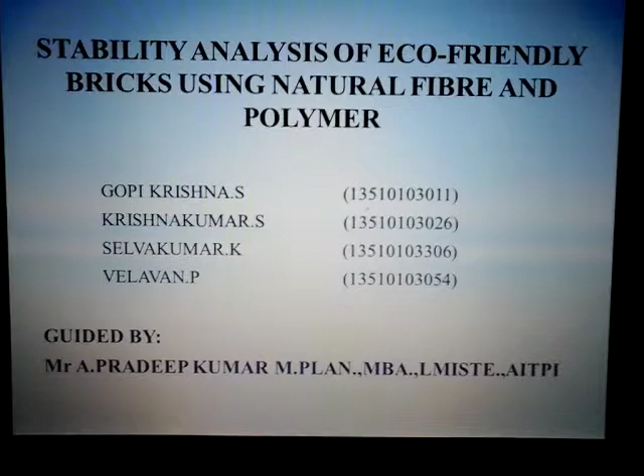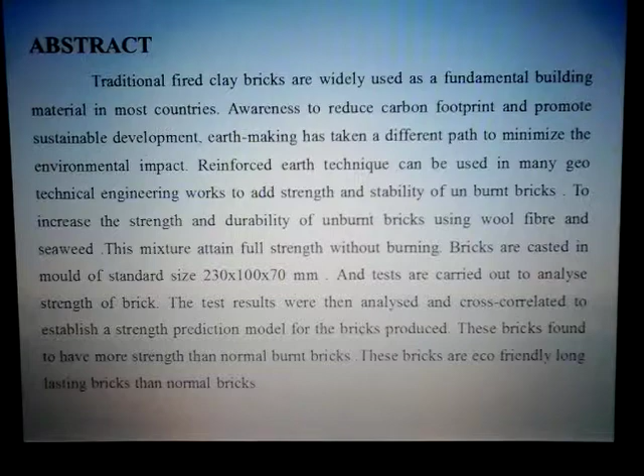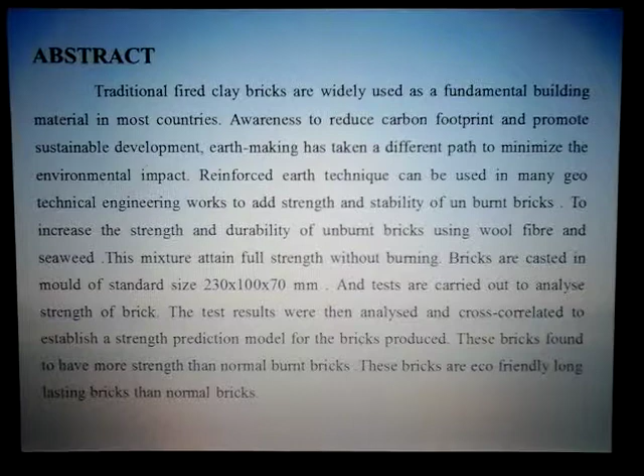This is our project abstract. Traditional fired clay bricks are widely used as fundamental building material in most countries. There is growing awareness to reduce carbon footprint and promote sustainable development. Reinforced earth technique can be used in many geotechnical engineering works to add strength and stability to unburned bricks, and the mixture attains full strength without burning. The bricks are cast in molds of size 230 x 100 x 70 mm, and tests are carried out to analyze the strength of brick. The tests are analyzed and cross-correlated to establish a strength prediction model of the brick produced. The bricks are eco-friendly and long-lasting compared to normal bricks.

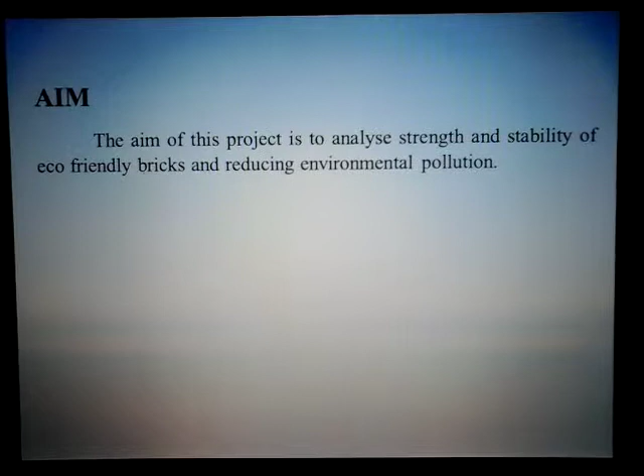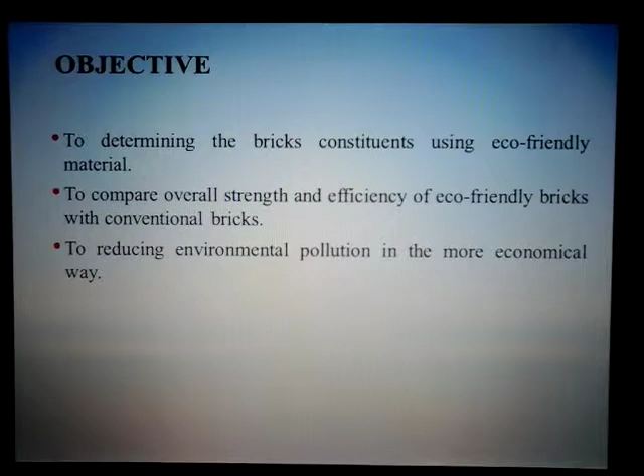Our project aim is to analyze the strength and stability of eco-friendly bricks and reduce environmental pollution. Our project objective is to determine brick constituents using eco-friendly material, to compare the overall strength and efficiency of eco-friendly bricks with conventional bricks, and to reduce environmental pollution in a more economical way.

This is our project methodology. First is site and soil selection, next is soil sampling methods, and soil sampling methodology, and next soil test methodology, which is split into field test and lab test. Next is mixing of wool fiber and seaweed, then molding, drying and testing, and last, results and conclusion.

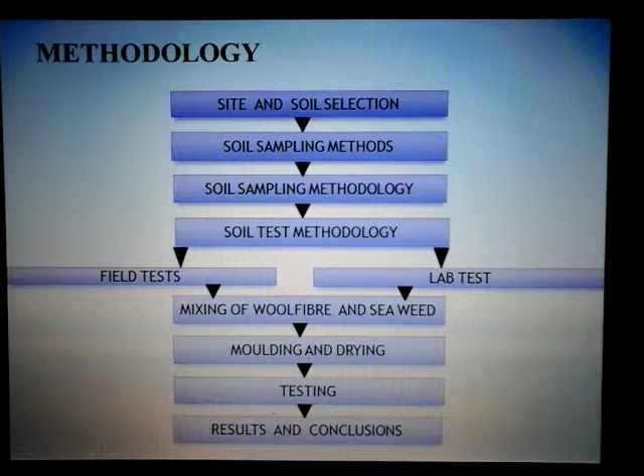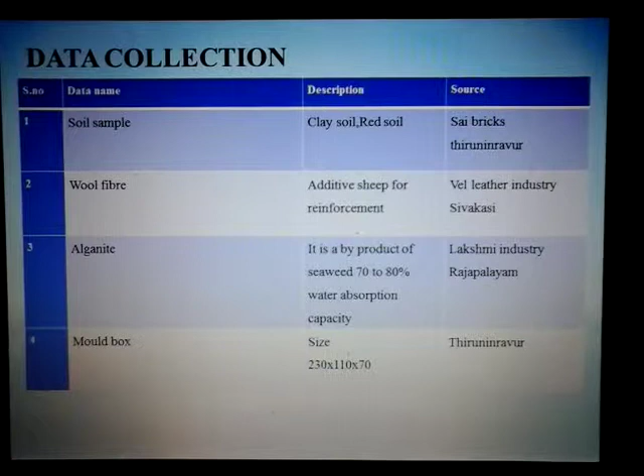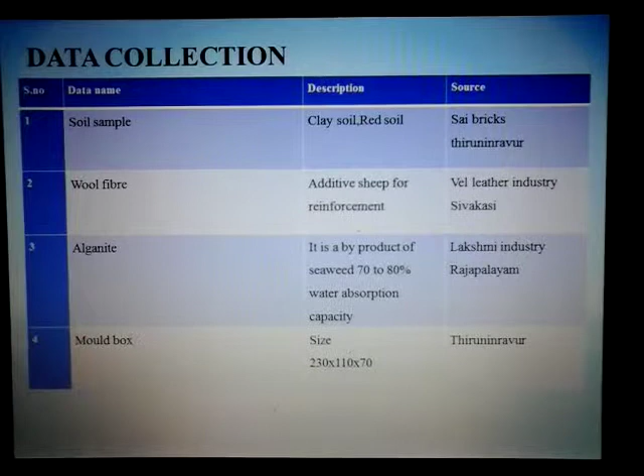This is our data collection. Soil sample was collected for clay soil from Sai bricks, and wool fiber was collected from Vel leather industry in Sivakasi. Alganite powder was collected from Lakshmi industry in Rajapalayam. The mold box was collected from Sai bricks in Thiruninravur.

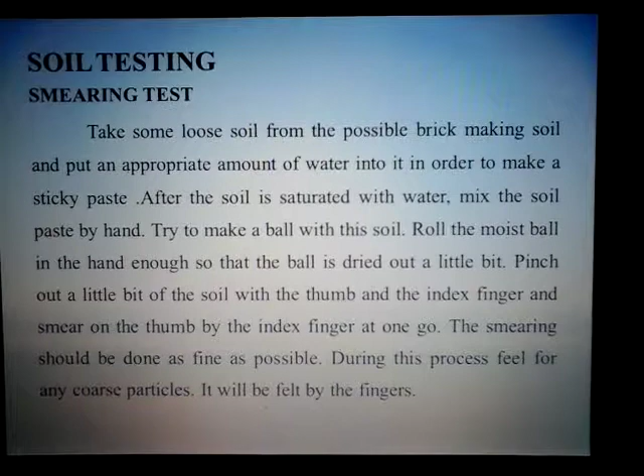This is our soil testing, the smearing test. Take some loose soil from the possible brick-making soil and put an appropriate amount of water into it in order to make a sticky paste. After the soil is saturated with water, mix the soil paste by hand and try to make a ball with the soil. This is our smearing test, which can be conducted in the field.

This is our lime test. Lime is one of the most dangerous minerals for brick making. The presence of lime in soil determines whether to start a brick business or look for alternate soil if none is available.

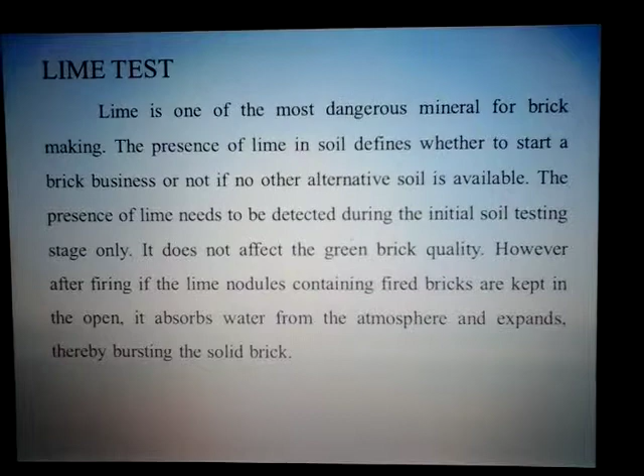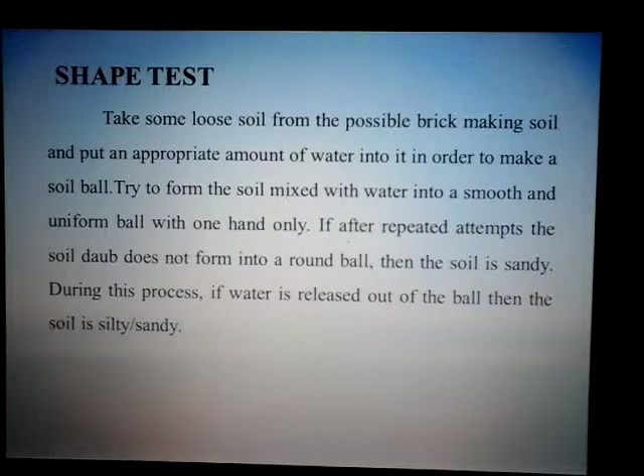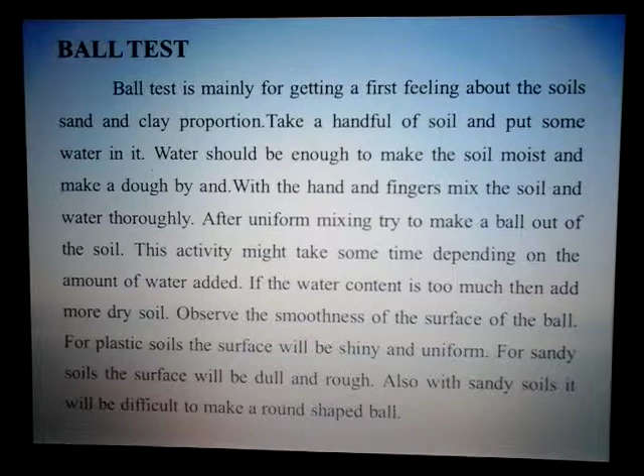This is our shape test. Take some loose soil from the possible brick-making soil and put an appropriate amount of water into it in order to make a soil ball. This is the ball test, mainly for getting a first impression of the soil, sand and clay proportion. Take a handful of soil and put some water in it, enough to make the soil moist, and make a dough by hand. With the hand and fingers, mix the soil thoroughly. After uniform mixing, try to make a ball out of the soil. This is the soil ball test.

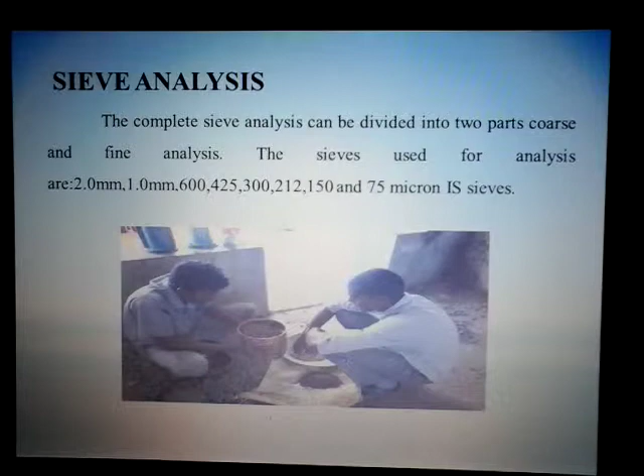Sieve analysis: the complete sieve analysis can be divided into two parts, coarse and fine analysis. The sieve sizes used for analysis are 2 mm, 1 mm, etc.

This is the liquid limit test. Liquid limit is the water content corresponding to the arbitrary limit between the liquid and plastic states of consistency of the soil. It is defined as the minimum water content at which the soil is still in the liquid state.

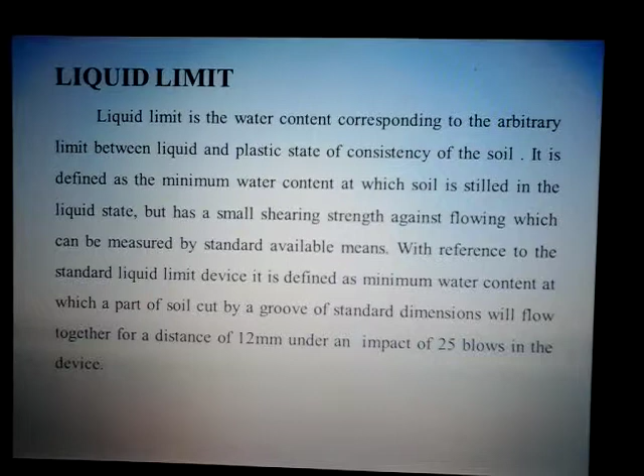This is our water content calculation: weight of wet soil minus weight of dry soil, divided by weight of dry soil minus weight of container. These are all our percentages.

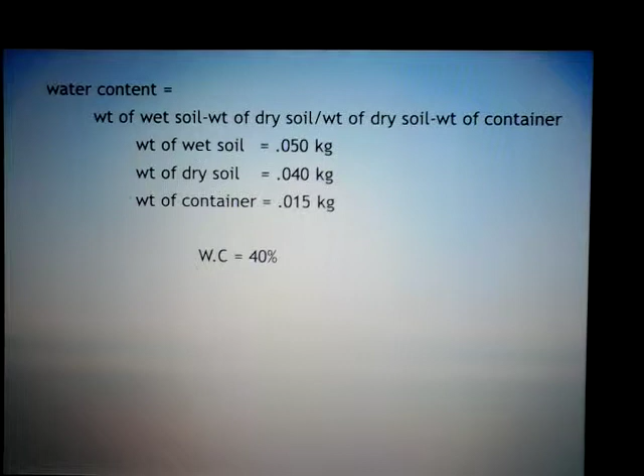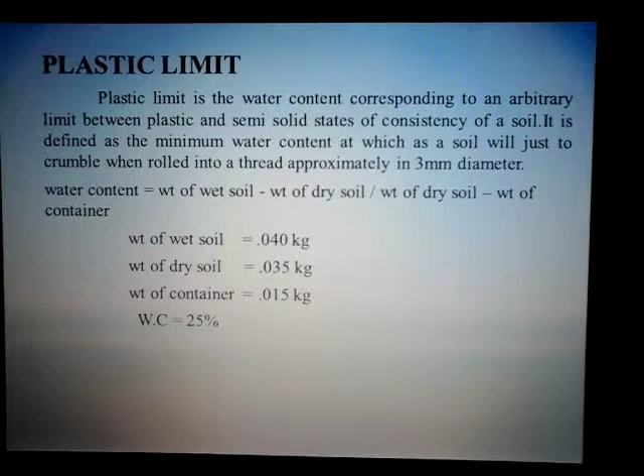And this is the plastic limit. Plastic limit is the water content corresponding to an arbitrary limit between the plastic and semi-solid state of a soil. It is defined as the minimum water content at which a soil will just crumble when rolled into a thread approximately 3 mm in diameter. Our plastic limit water content is 25%. Next, this is the plasticity index.

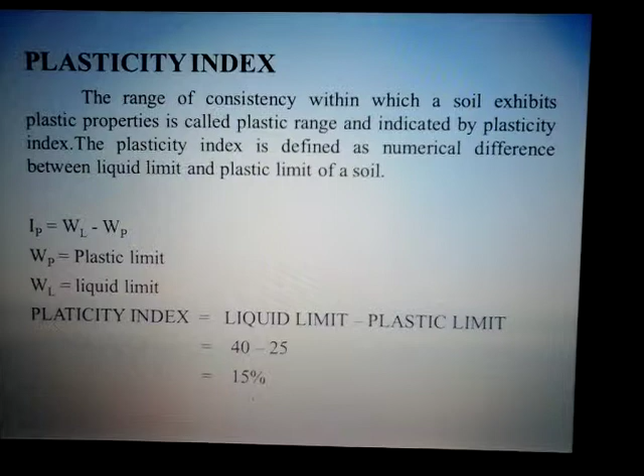The range of consistency within which a soil exhibits plastic properties is called the plastic range. Plasticity index is equal to liquid limit minus plastic limit, where plasticity index is equal to 40 minus 25, which is equal to 15%.

And then mixing of wool fiber and Alganite. Wool fiber is different from other fibers. It is additional reinforcement for a brick. Wool is a protein fiber composed of more than 20 amino acids. The amino acids form protein polymers. Wool also contains small amounts of fat, calcium and sodium.

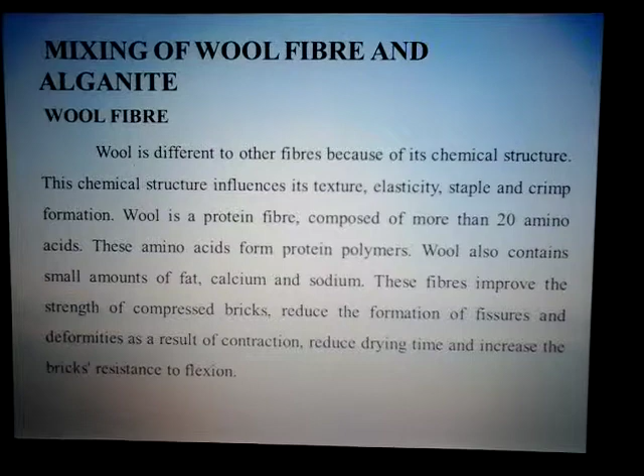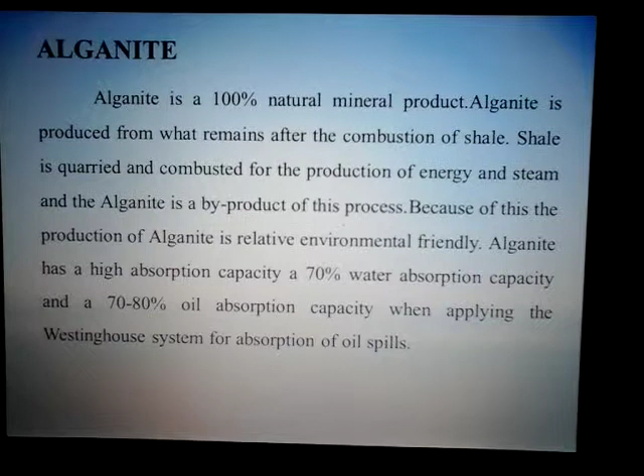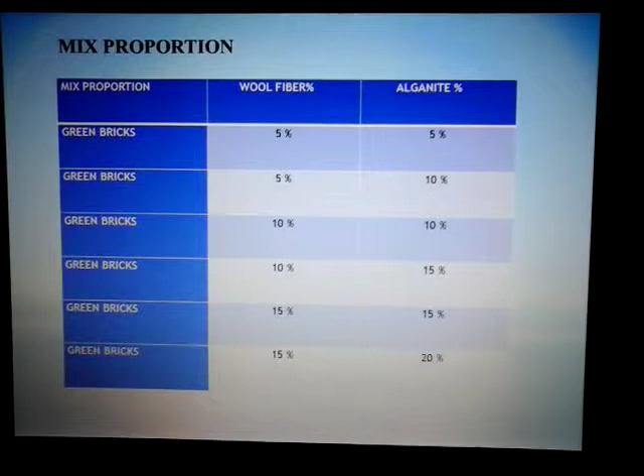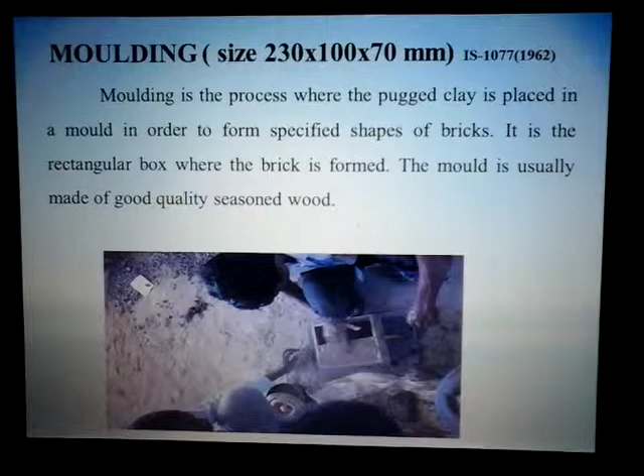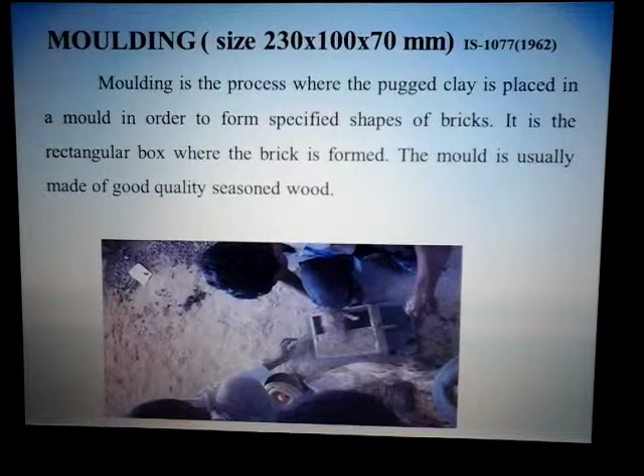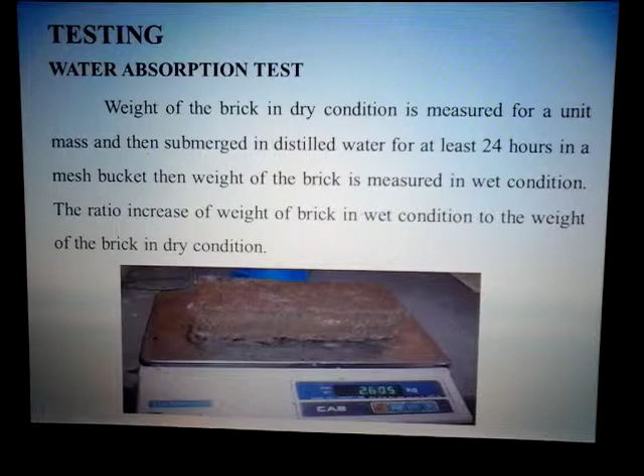And this is testing for the water absorption test. Weight of the brick in dry condition is measured and then it is submerged in distilled water for at least 24 hours. The weight of the brick is measured in wet condition.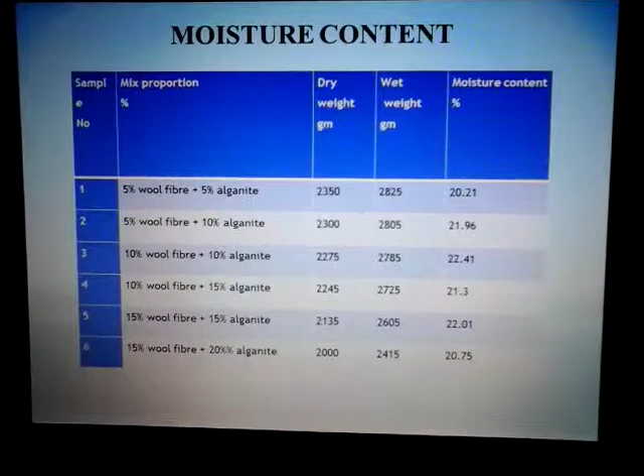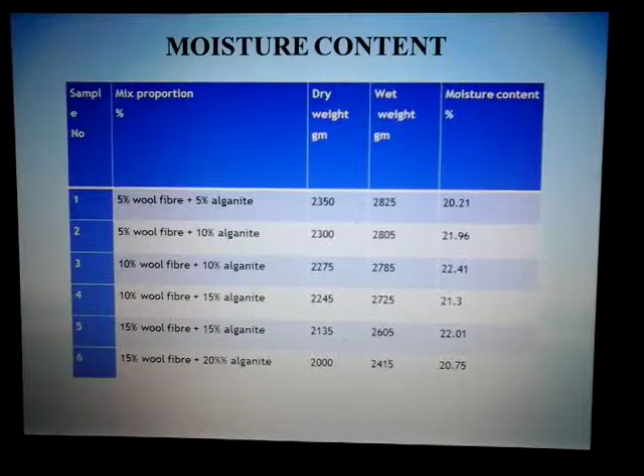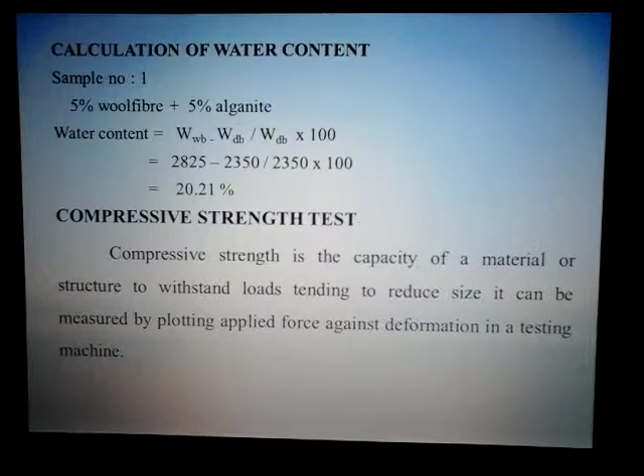And next, the moisture content table. We got for the first sample 20.21, next sample 21.96, third sample 22.41, next 21.3, next 22.01, and last sample 20.75. Next, calculation of water content: water content is equal to weight of wet brick minus dry brick, divided by weight of dry brick, times 100.

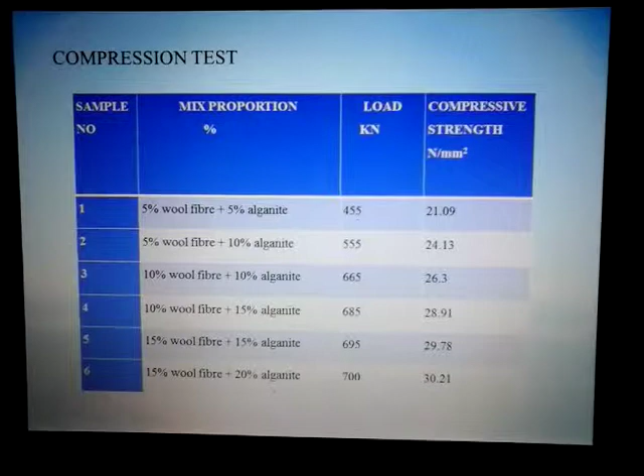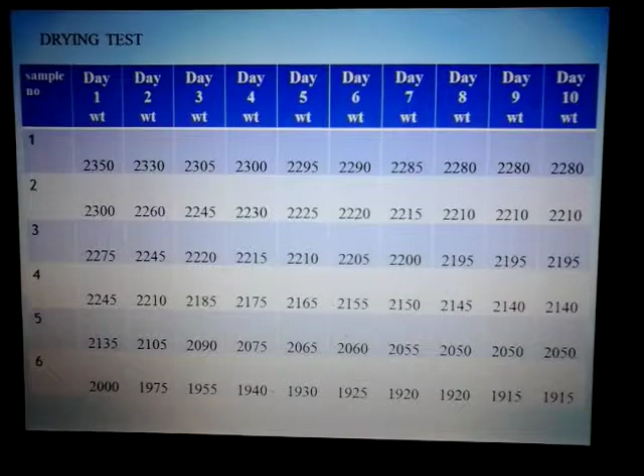Compression strength test. Next, compression test: we conducted the test, the first sample gave 21.09 Newton per mm square, and the sixth sample 30.21 Newton per mm square. This is the compression test at college. This is a drying test for 10 days using sun drying. Sample 1, sample 2, sample 3, sample 5, sample 6, we weighed them as they reduced day by day.

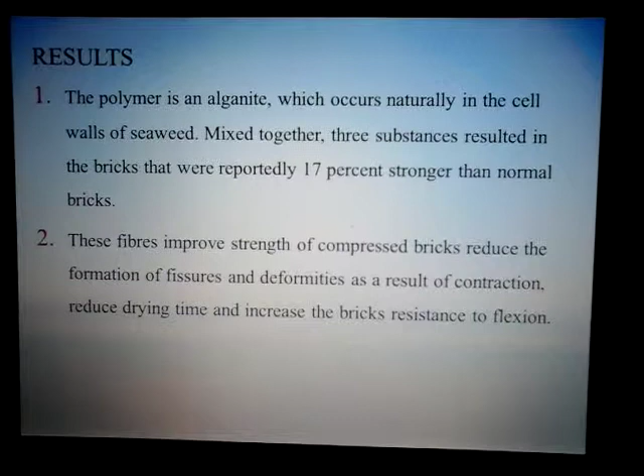Results: the polymer is alginate, which occurs naturally in the cell walls of seaweed. Mixed together, the substance resulted in bricks that were reportedly 17% stronger than normal bricks. The fiber improves strength of brick, reduces the formation of fissures and deformity as a result of contraction, reducing drying time and increasing the brick's resistance to flexion.

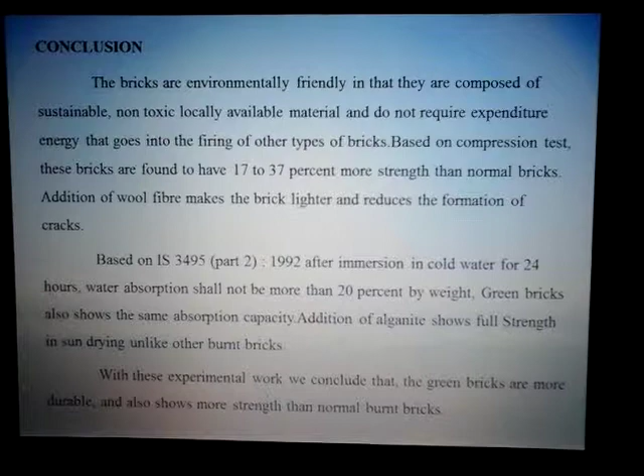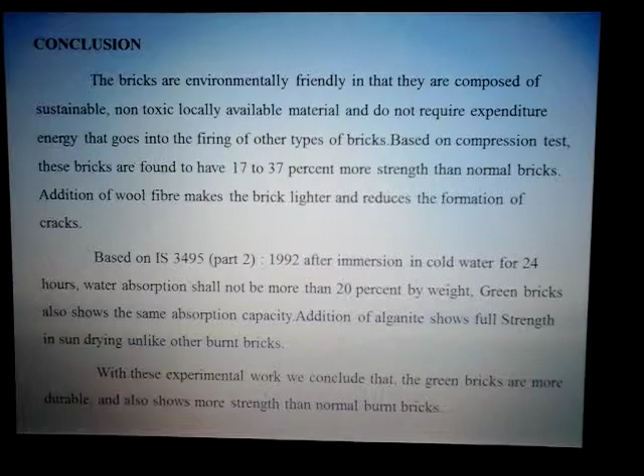As the conclusion of the project, the bricks are environmentally friendly in that they are composed of sustainable, non-toxic, locally available material and do not expend energy. And these bricks are found to have 37% more strength than normal bricks. Based on IS 3495 Part 2, 1992, after immersion in cold water for 24 hours, water absorption shall not be more than 20% by weight. Green bricks also show the same absorption capacity.

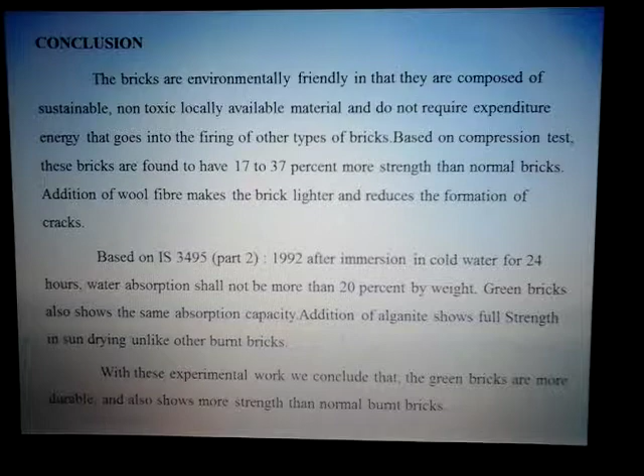With this experimental work, we conclude the green bricks are more durable and also have more strength than normal bricks. This is our reference.